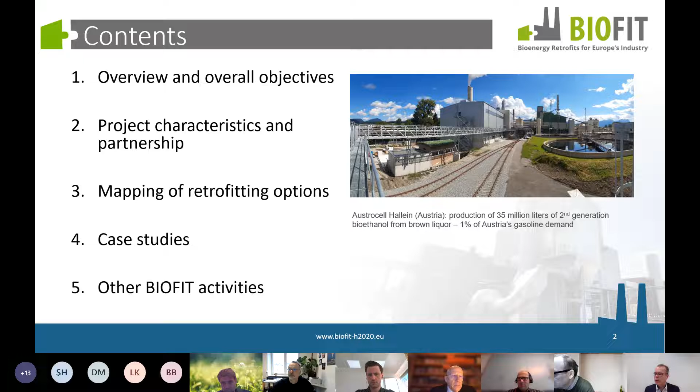BioFit is about the importance of bioenergy for energy production and consumption in the European Union. About 58% of the renewable energy consumed in the EU is bioenergy. Yesterday we heard from the Bioenergy Europe presentation that in 2019 it's more or less the same, so it continues to be important.

That is also the idea of the IEA, which said so in their technology roadmap. Bioenergy is also not considered a transitional fuel by the EU, but is here to stay.

Interesting, what we saw yesterday was that the framework conditions are a very important part of the whole implementation. One of the case studies, Fiume Santo in Sardinia, at the start of the project was considered a good case study. During our project implementation the framework conditions changed, and it turned out that it's not possible anymore for now. So we see they very much impact what we do.

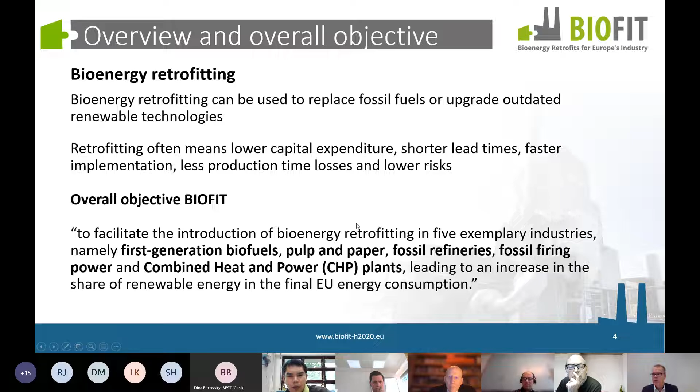We did this with 14 partners. Our project lasted a little bit more than 3 years, and we are now near the end of the project. Yesterday we had case studies in France, Italy, Greece, and Bosnia-Herzegovina.

And now we go to all different countries: Sweden, Finland, Austria, and Spain. We span many countries in Europe—not all, that's too much, but quite a lot of countries are featured there.

What we did was a number of mapping exercises to show how many successful examples of bioenergy retrofitting there are. We made very nice fact sheets, sectoral recommendation papers, and a very nice handbook which shows in detail what the various options for bioenergy retrofitting are, and we will soon have a set of digital support tools available on the website.

This is the flagship of our project. We have developed 10 case studies together with market parties that are working in the field and are looking to decarbonize their operations. Yesterday we worked on the right part of this graph, so it was on fossil refineries, fossil-fired power and CHP.

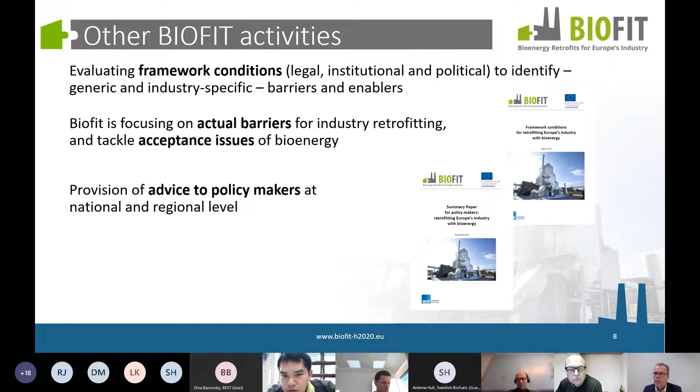We have done a lot of meetings to inform, support, and have dialogue with industry. Besides industry fora, we have also had 2 virtual business missions, and they are virtual because of COVID. One of them was to Brazil, and the other one was to Ukraine.

Today we have 2 sessions. The first session is roughly 1.5 hours. It is about pulp and paper. We will talk about the hydrothermal carbonization of pulp mill wastewater sludge, so it's typically an optimization project. And the other one is the production of second-generation biofuels at AustroCel Hallein, and you will see more of the thing which I showed you the picture of earlier in the presentation.

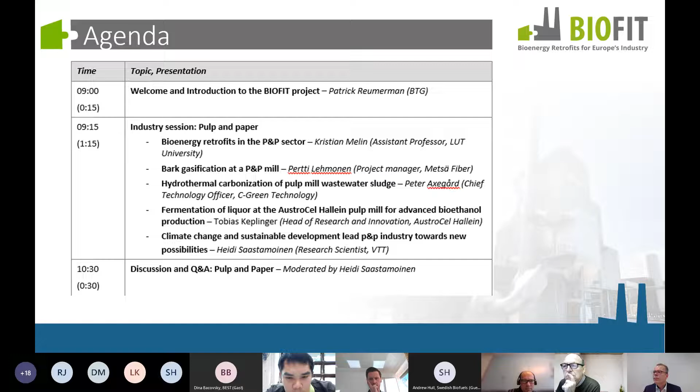Then we will have a short break and we will go to the second part of the conference. It's about 1G biofuels. We will talk about the Biocarburantes de Castilla y León 1G plant in Spain, and we will talk about one of the ways to produce jet fuel from biomass. This is, of course, a very hot topic, and one of the ways to do that is via the alcohol to jet process, so Swedish Biofuels will give a presentation on that.

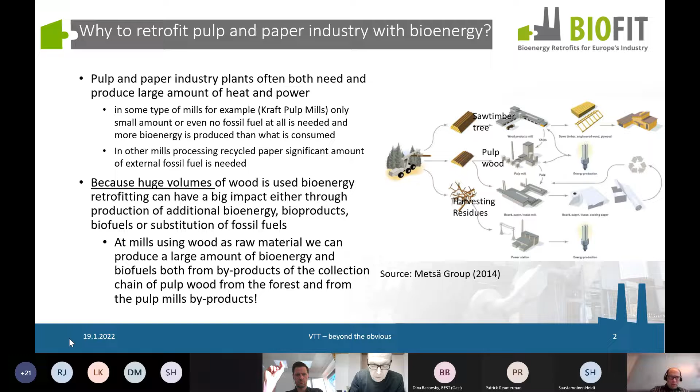Okay, let's go on, checking the time. So now something about the drivers and barriers for pulp and paper industry retrofits. Why are some drivers present, especially at the chemical pulp mills?

Chemical pulp mills already today produce a lot of bioenergy. All the time we have this development where mills are getting more energy efficient, so there is a bigger and bigger possibility to produce something else than just energy for the plant - more bioenergy or additional products like biofuels or bioproducts.

Another development is that, at least in Finland, earlier the pulp and paper mills were located next to each other, but new mills, for example Äänekoski, have the paper produced somewhere else. This means there are a lot more possibilities to produce additional products or bioenergy. And of course we have the global trend that newsprint paper production is decreasing.

So there is a need to produce other products besides paper and cardboard, and that could be done through bioenergy retrofits. I heard a famous expert, some of you may know Ali Harlin, say that even though cardboard production is increasing, it still doesn't make up for all the decrease in newsprint production. So there is really a need for new products.

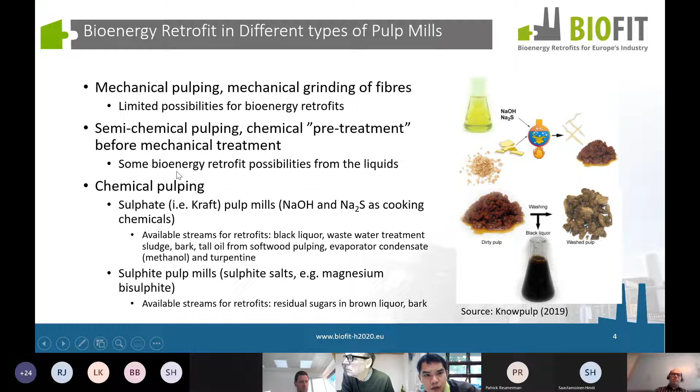I illustrate on the next slide more in detail those, but there is the black liquor and bark and so on. And then there is the different type, the sulfite pulp mills. The sulfite pulp mills are less common today.

And these have totally different possibilities, the sulfite and sulfate kraft pulp mills. So let's then consider first these kraft pulp mills, which are the most common mills, at least up here in the north, but I think also in the world. So how does this process basically work?

So it's so that we basically cook wood chips in the pulping step, and what happens is that some part of the wood dissolves in this liquid called black liquor. In this case, it's mostly some part of the hemicellulose and lignin that goes here, and the sugars are actually degraded, so it's not possible to make any kind of fermentation after the pulping step from them.

And then, okay, the pulp is basically bleached, and then if the paper plant is at the same site, there is cardboard production. But then what is interesting for the retrofit is the byproducts.

Here, this liquid after pulping contains quite a lot of water, up to 85%. But already when we concentrate it by evaporation, we get some streams that can be utilized. For example, from the evaporator condensate we get methanol, and I will explain a bit more in detail about that later. A small amount of methanol, and then okay, the black liquor.

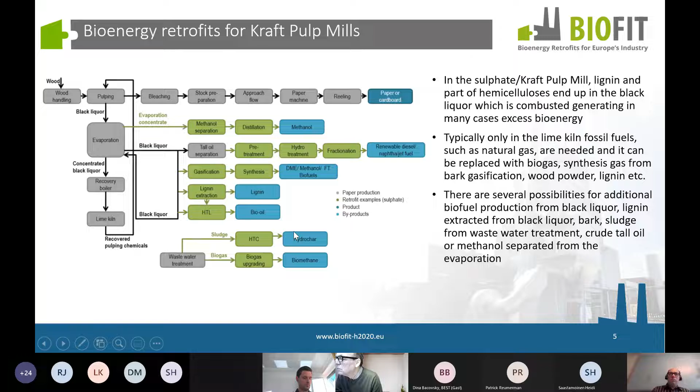And of course, there is also production of wastewater at the mill, and there is typically this activated sludge wastewater treatment process, but there could also be biogas production from this sludge, and another option that we will hear about, studied also as a case in this project, is hydrothermal carbonization, turning that into biocoal or hydrochar.

Then, okay, if we look at the status of these retrofit options today, we have to keep in mind that they have different technical readiness levels. Some of them are already commercial, whereas some are still in the demonstration phase or pilot phase, or even at a lower technical readiness level.

So what is commercial today is biogas production from mill wastewater treatment. For example, in Äänekoski there is production of biogas, and I think nowadays this belongs also to Metsä Fibre. And then there is gasification of bark, which we will hear about today, already practiced in two mills in Finland by Metsä Fibre.

Then there is lignin extraction from black liquor, for example the LignoBoost process in Sunila in Kotka by Stora Enso, or then Domtar in the USA. There are also other processes than LignoBoost for extraction of this lignin. I think there is LignoForce, and Andritz also has this A+ Lignin.

And then there is also biofuel production from crude tall oil. Maybe a famous example is the UPM biorefinery in Lappeenranta, but also in the northern part of Sweden there is SunPine. I think that was in Piteå.

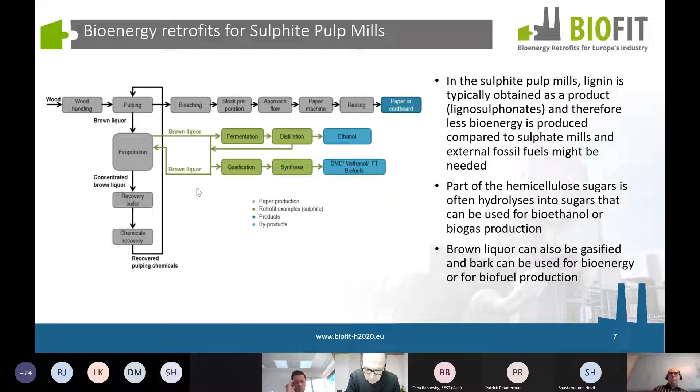Here, after pulping, in the brown liquor we actually have fermentable sugars produced from the hemicelluloses, and they can be turned into ethanol or biogas. One other process that has been studied, at least conceptually - I don't know if it's been demonstrated at any larger scale - is the gasification of the brown liquor.

Let's go to the next slide for some examples. Biogas production has already been run at other plants. For example, Austrocell, which we'll hear more about today, has produced biogas earlier, and retrofitting this to bioethanol production is being studied as a case study we'll hear more about.

Ethanol has also been produced at the Borregaard plant, which as far as I know is also an old sulfite-type mill. I could also mention that during the summer I visited Metsä, or in Mänttä, there was a museum with a sulfite pulp mill, and they mentioned they had produced bioethanol there, and also had some development to produce single-cell protein, but this facility has since been closed down.

Then to the summary slide. Finally, retrofitting in pulp and paper mills is interesting because there are such big volumes - so even if we use a smaller side stream, it will have a large effect.

What kind of retrofit options do we have? It really depends on the type of pulping process - is it chemical, semi-chemical, or mechanical? And is it a sulfate or sulfite process? Also, whether fossil fuels are still used at the mill or not.

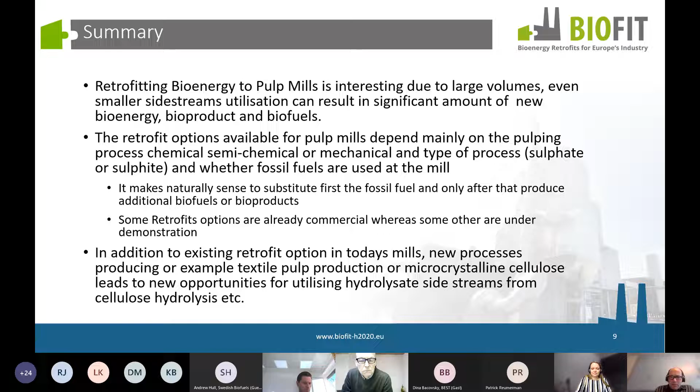So I think that was more or less it. Hopefully I kept the time. I just want to thank - it was a pleasure to work on this project, and special thanks to Heidi Saastamoinen and Elina Mäki from VTT. If you have questions, I will stay for the questions, but you can also find my email address - so please contact me.

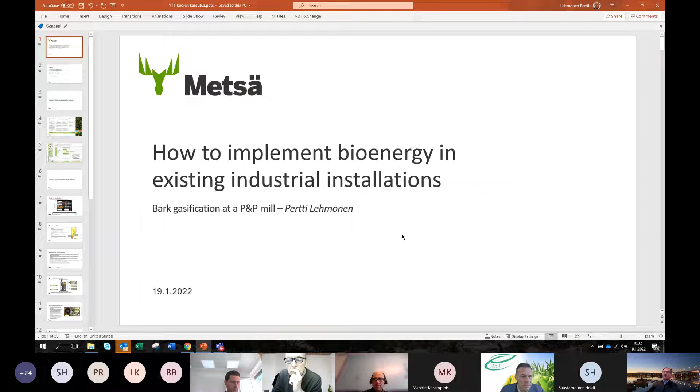My presentation is about how to implement bioenergy in existing industrial installations at the Joutseno gasification plant, and I'll also take the opportunity to discuss a little bit about the Äänekoski gasification.

I'll start with our targets, share our sustainability targets at Metsä Fibre, give you a few words about the gasification process itself, then we can go deeper into the Joutseno and Äänekoski bark gasification plants, and then discuss the experience about the gasification processes.

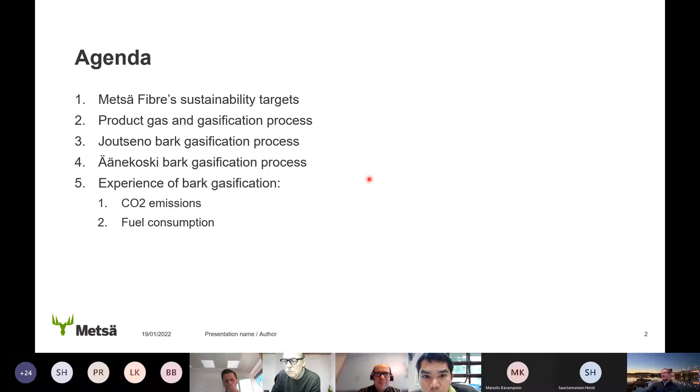We at Metsä Fibre are aiming for fossil-free operations, and one part of this fossil-free operations goal is to reduce or replace fuel consumption in the lime kilns. That is the last and might be the hardest part to achieve fossil-free production in the pulp mill.

Our roadmap to fossil-free production aims at 2030 to be totally fossil-free, and these lime kilns are the last remaining processes consuming fossil fuels. We have two lime kilns already operating with non-fossil fuels, and we're building a new pulp mill in Kemi, which will have bark product gas as fuel in the lime kiln. We're studying what to do about the existing Rauma pulp mill, where we're also building a new sawmill. We're quite confident we can reach this target by the end of the decade.

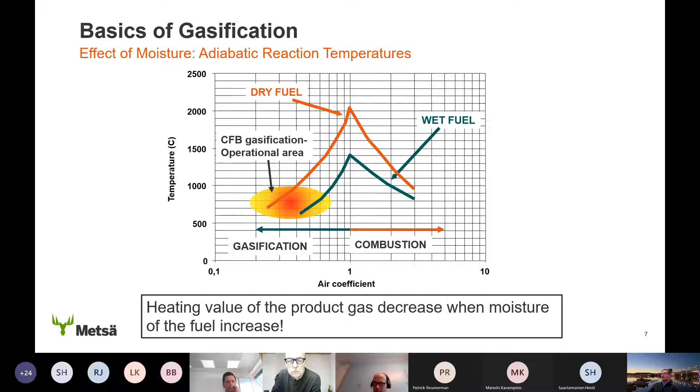The gasifier itself is a kind of circulating bed gasifier connected directly to the lime kiln, so the gas flowing from the gasifier to the kiln is called dirty gas. There is tar and dust particles that burn in the lime kiln. It's unpurified gas, so the major portion of the wood ash is fed to the kiln.

The circulating bed material is calcium carbonate, and the kiln power need controls the fuel feed to the gasifier itself. We get the primary air back to the gasifier from the kiln cooler, so the energy efficiency of the gasifier is quite good.

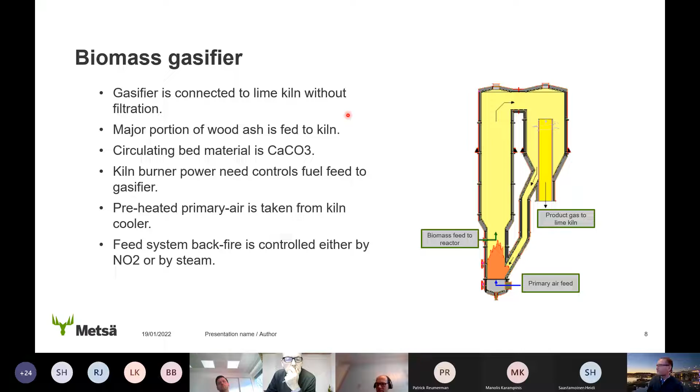We need to have a backfire control system here. It's done with either nitrogen or steam - not nitrogen oxide, just nitrogen or steam - that prevents backfire into the fuel feed system.

Properties of the product gas are that it's quite hot, so it's capable of self-igniting. Normally we operate at the 700 to 800 Celsius level in the gasifier, so it will ignite when it meets oxygen. Operating temperatures are also above the tar condensing temperature, so we don't have to worry about tar condensing in the gas lines.

Gasifier temperature is achieved by partial burning, so the air factor of the gasifier is about 0.3. The product gas contains lots of unburnt carbon and ash from the fuel, and the heat flow of unburnt carbon is about 20% of the total heat flow. This will of course burn in the lime kiln, but it's something to consider if this kind of application is thought of for other processes than the lime kiln.

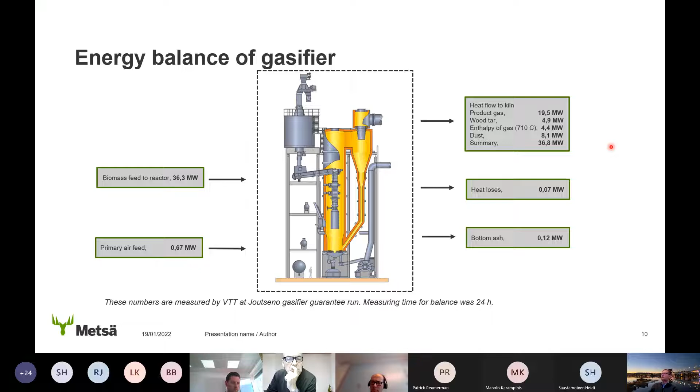The burner can be operated 100% with the product gas without support fuel, and fuels can be switched, turned off and on quite flexibly. The kiln parameters, how it's operated, are exactly the same with or without product gas, so it's operated by the oxygen level in the flue gases and by the residual carbon in the burnt lime.

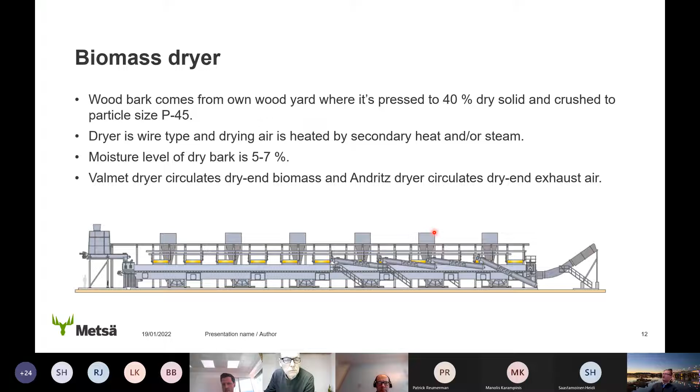There are two major suppliers in the pulp and paper applications, Valmet and Andritz, and they are a little bit different in terms of the wire design, but the basic principle is the same, it's a belt dryer. Valmet is circulating this biomass, and Andritz is circulating the exhaust air from the dry end of the dryer.

In the Joutseno process, we are operating with a burner power of 48 megawatts, and we have to evaporate water in the bark dryer at 12 tons per hour.

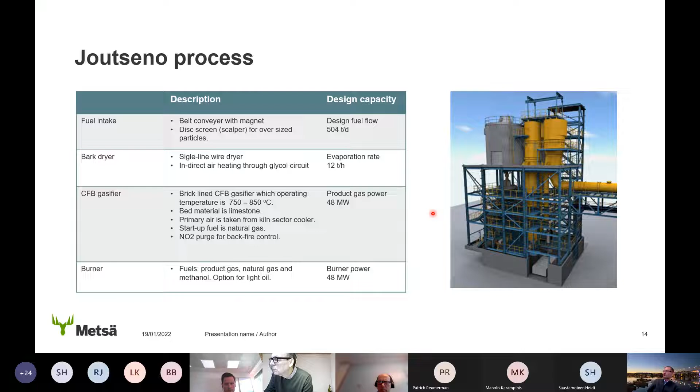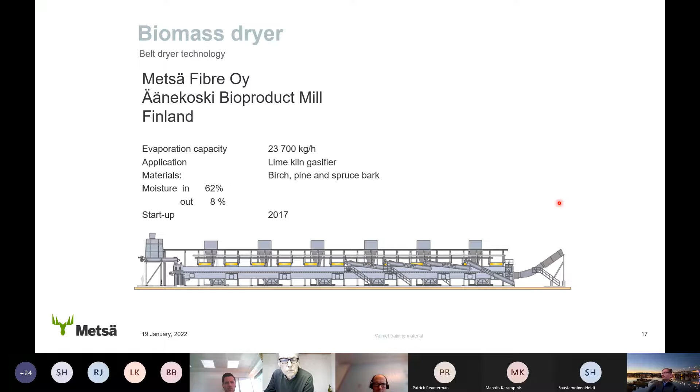Our Äänekoski mill is a little bit bigger, so we have more power in the burner, 87 megawatts, and we have to evaporate water here over 20 tons per hour, so it's 23.7 tons per hour evaporation rate. In Äänekoski we have birch, pine and spruce bark, as well as in Joutseno.

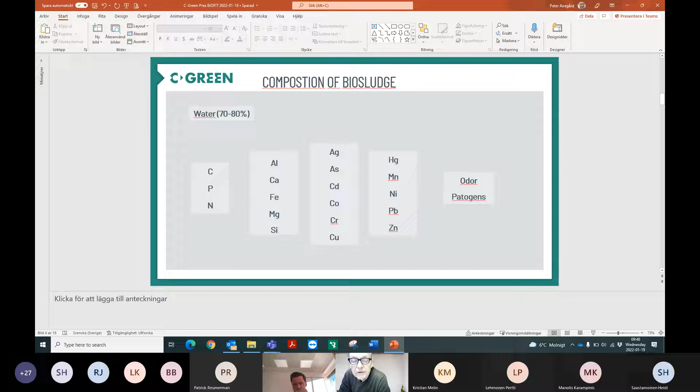And it has a certain carbon content. The yield of carbon could be 50-60%. Phosphorus has a higher recovery into the solid product, and nitrogen is distributed between the solid, water, and the hydrochar.

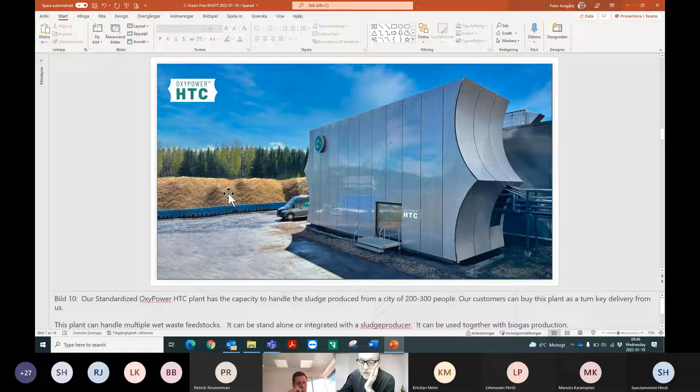What more to say here? This is how it looks today. We are trying to have a nice appeal, so this is just a nice image. In the background you see a big pile of wood chips, but we are not processing wood chips at all.

Our process, very simplified, is that we take in the water sludge. We heat it, we dilute it, we heat it with internal water. From our process we heat it with steam, so it reaches 200 degrees. We heat this in steps with direct steam and dilution with hot water. The reaction time here is about 1 hour, and here you get the carbonization of the organic substances.

So a slurry of hydrochar particles, HTC biocoal particles, is formed and sediments to the bottom. This slurry is taken out and the water is removed by press filtering. Here you see the solid product.

The liquid phase contains dissolved organics and some nitrogen, and we treat this water with oxidant from air, which oxidizes the water, or the organic is oxidized, and heat is created, and we recycle steam. So we are completely heat self-sufficient. It is also possible to produce excess heat at high temperature levels if there is a need for that. Otherwise we don't do it, and we have more organics in the water. And the water after this treatment is taken back to the wastewater treatment plant. That is the short version.

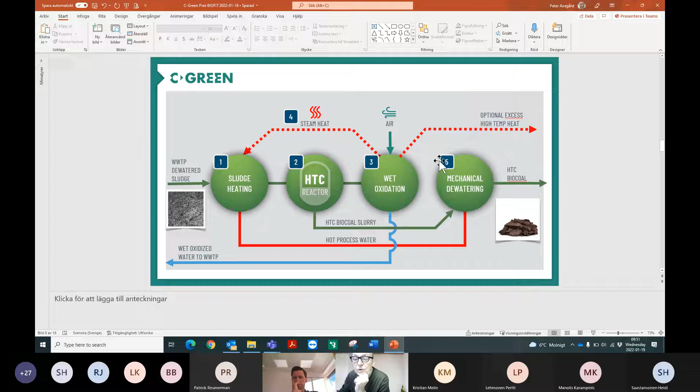What happens in HTC is simply this: in the first minute, or seconds I should say, at 200 degrees, there is a rapid loss of gravimetric yield, and this is the HTC chemistry. Most of the molecules in the water are decarboxylated and dehydrated, and this means these molecules are becoming more and more hydrophobic. That's why a solid phase is built up gradually, and sediments.

That's why we need up to 60 minutes to get this phase separation, where you have a hydrochar slurry, that is the water, and the liquid phase containing the dissolved organics goes through wet oxidation.

In wet oxidation there is a lot of chemistry happening. We start at 200 degrees, then increase it to 230 by releasing steam. Before wet oxidation, the water is very odorous and contains significant amounts of COD and organic nitrogen. In the wet oxidation process, COD is reduced by up to 70%, producing heat, and the nitrogen is converted to ammonium ions that can be used as a sort of fertilizer in the pulp mill, paper mill, wastewater treatment plant.

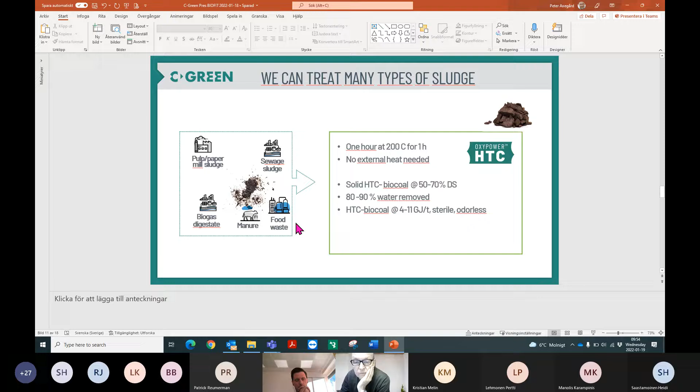Applications: biofuel, of course, is an interesting opportunity, in contrast to sludge that has a negative heat value. This is, I would say, not recommended because the customer decides, but it makes sense in some cases where pollutants are involved—then incineration in a classified boiler is the way to deal with it most likely.

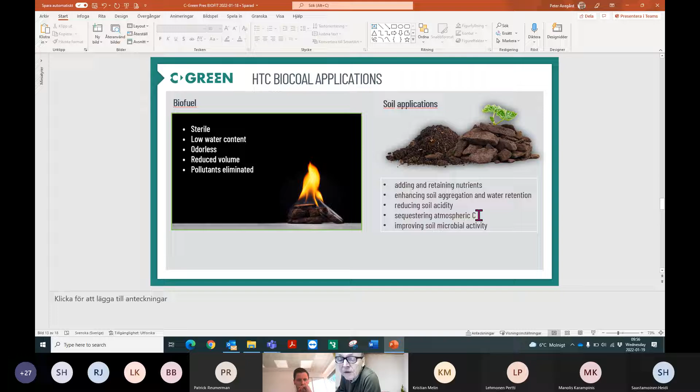But we also look into soil applications, and if you have a relatively clean sludge, this is an interesting opportunity. Often in Sweden, and I guess Finland too, peat is used as a soil additive together with other feedstocks. So hydrochar could fit nicely into peat mixtures. This hydrochar contains nutrients and has some water retention capacity and things like that. It's relatively stable in soil, so there are some environmental benefits.

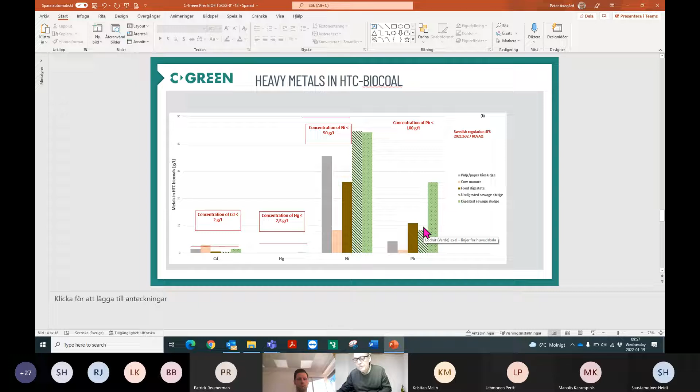So I will show you some slides here. Heavy metals in the hydrochar—you see for different feedstocks the range. This is the pulp mill case, the gray one. This is the limit values for soil applications in Sweden. And all feedstocks are below the threshold level except manure—assuming they were using some cadmium-containing nutrient on the soil on that land. Mercury is well below, nickel is well below, and lead is also well below. So soil applications from this point of view could be possible.

In addition, as you can see, it's a very nice place to work. It's a beautiful scenery. So after COVID, I would be more than happy to welcome you in our mill to show you the bioethanol production. And after that visit, you can then enjoy the nice area in Salzburg.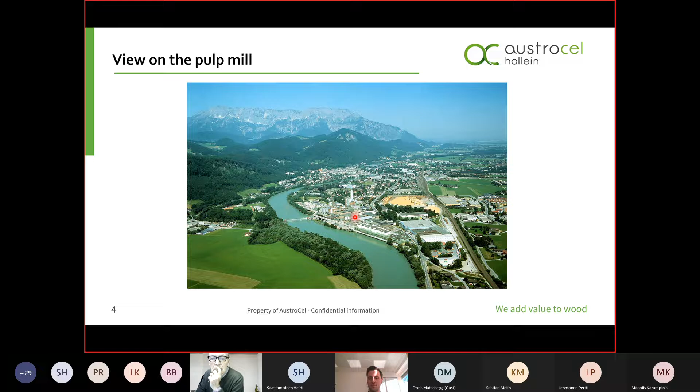I want to give you a brief history, because I think it's important to understand why this bioethanol production was so important to us. Basically, the pulp mill in Hallein is one of the oldest, or the oldest, industrial company at the same place in Austria. We have been operating at the same place since 1890. Over the years, we had different owners, and of course there have been different retrofits. But I want to highlight one major year, which was 2009.

In 2009, we stopped our paper production. Of course, this was a big cut. At that point, we started to think what could be a possible economical scenario in the future, which kind of products, which kind of strategy. This is also the starting point for our focus on bioenergy in general, because we decided at that point to switch our production from paper pulp to viscose pulp, and in addition to bioenergy applications. This was during the last years since 2009.

So basically, we invested a lot into our biogas production, and after the biogas production, we started to invest in, or to build up, our bioethanol production.

Just some numbers about AustroCel in general. As I said, our main product is still dissolving wood pulp, so high specialty wood pulp with very high purity. At the moment, we are producing around 120 to 140,000 tons of pulp. We are nearly 300 people in the mill.

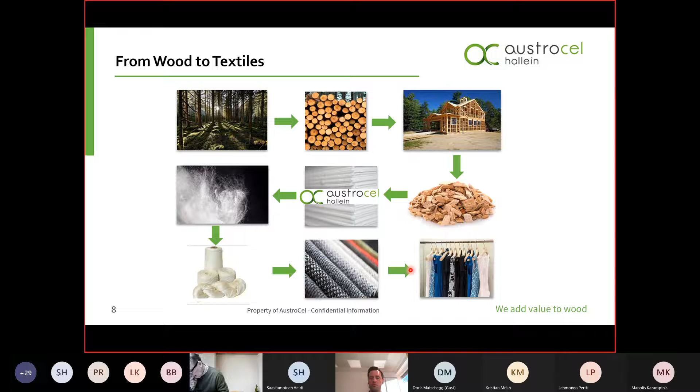I'm pretty sure you all know that during the pulping process, the main component you utilize is the cellulose. But cellulose is only around 40% of the total composition. So it's very important for an efficient process to also make use of the rest of the wood components, which are the hemicellulose and the lignin.

During this pulping and cleaning process, you remove the other components. The cooking liquid, for example, is composed of lignin and sugars. The great thing about this brown liquor is that the sugars are already present as monomers. So you can directly make use of these released sugars for fermentation, to produce bioethanol, which I'll show in the next slides.

Of course, you also remove filtrates and rejects during the cleaning of the pulp, and it's important to make use of them too. One example: out of these filtrates, we do biogas production. This organic material is fed into four biogas reactors, producing biogas at a capacity of around 2,000 cubic meters per hour.

This biogas is then fed into a large biogas motor with about 5,000 horsepower, producing a substantial amount of electricity. We also have a biomass CHP, where we put in internal residues from our pulping process, producing electricity and heat. The heat is partly fed into the national grid, but also used internally, for example to run the drying machines for pulp production.

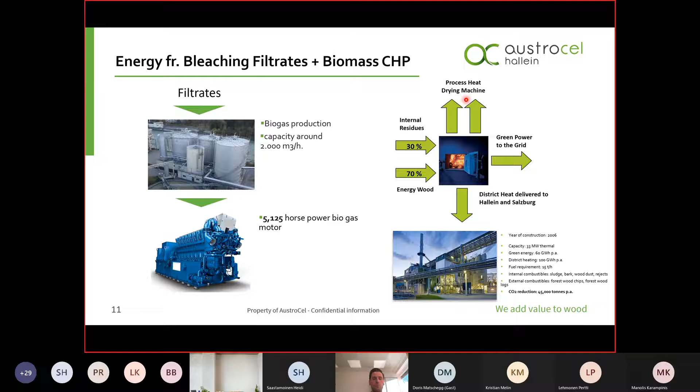But the focus today should be a bit more on the bioethanol production, so I'll give you a brief overview of the project. Bioethanol production in Hallein is not new—there was already bioethanol production from brown liquor during the years from 1941 to 1988.

This is important because brown liquor is actually a quite challenging medium for bioethanol production. Based on this long-standing experience, there was a calculated technological risk taken for a new project to build a new bioethanol production for second-generation bioethanol. During 2007 to 2009, there was already a comprehensive pre-project and feasibility study, determining, for example, the economic feasibility.

There was also quite some research and development going on. But as I mentioned before, in 2009 our paper mill was shut down, which was, economically, quite a challenging situation, and it hindered realizing this project. Then, in 2011, as I also mentioned, the switch was made to producing dissolving wood pulp.

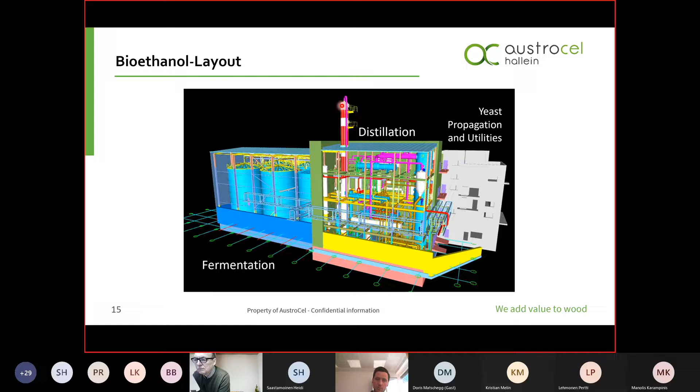So one picture of our bioethanol facility you can see here. This is just the planning. As I've said, there are basically two main parts. Here you see the fermentation tanks, we have four of these. Here the continuous fermentation is going on, and then the fermented slurry goes into the distillation plant with the big distillation column.

And of course this is also very important, that you have a railway connection in order to transport the bioethanol to the customers.

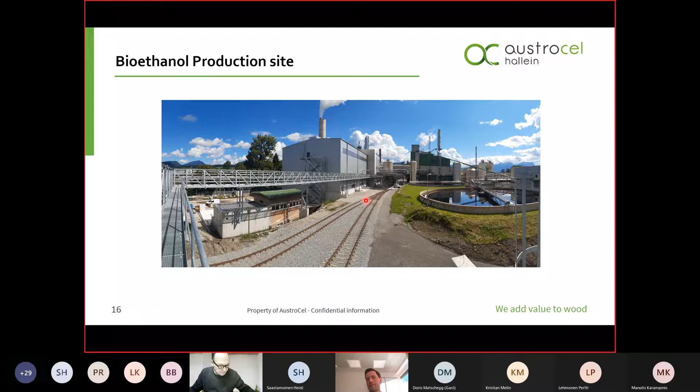What else? I also want to briefly highlight that for this project, one of the main things that was very important for a successful project is research and innovation. So basically what we do in-house, all the development in terms of fermentation, testing yeast, developing yeast, we did in-house. This is expertise that we have in our research department.

This is of course connected with all the according analytics in terms of HPLC, sugar analysis, and things like that. I think this is very important because, as I said before, this liquor is quite challenging in terms of inhibitors and things like that. You need this in-house expertise to have solutions when there are any kind of problems during production. So basically what we have is not only lab scale experience.

I think these are important factors to be successful for a project like that. In summary, for this bioethanol project, we successfully implemented bioethanol production in the brown liquor cycle, as I described before. The whole project had an investment of about 42 million euros.

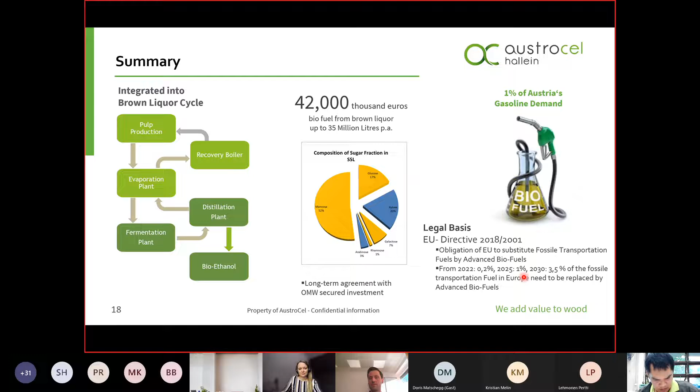And this is our motto: AustroCel is fighting climate change, don't talk, just do it. I think with this project, this is exactly a support for this statement. Many thanks for having the opportunity to present this project here.

Thank you very much, Tobias. This is a good motto and a nice plant you have there.

I will present the last presentation myself. It's concluding the results that we have in the BioFit project for the sector. Let me know if you can see my slides now. Yes, we can see them.

So to conclude, as you have heard today, bioenergy retrofits lead the pulp and paper industry towards new possibilities. First, I want to show you some statistics from CEPI to showcase the size of the sector we have in hand. We have almost 900 mills in Europe, producing annually 36 million tons of pulp and 85 million tons of paper and board in Europe.

The number of mills has steadily decreased since the 90s, while for at least the last decades, pulp production has stayed relatively stable. As you've heard already, the sector is revising their business models, seeking new high-value products and widening their product portfolios.

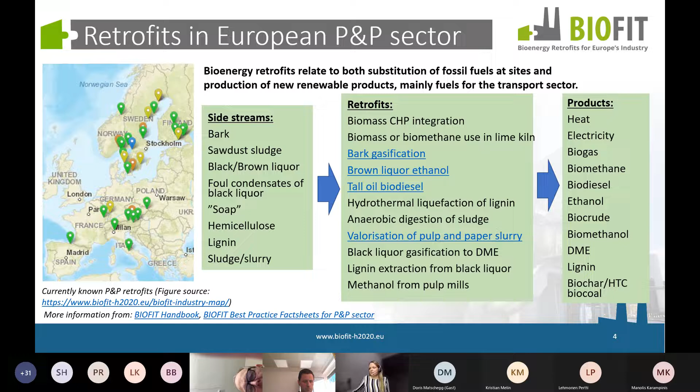Then drivers, Christian already talked a bit of this. So we have digitalization, which decreases print paper consumption globally, and that means we need to find new products for the sector. Then we have climate change mitigation, we need new renewable energy sources, fuel sources, and product sources. And also, as Tobias highlighted in the last slides, we have targets, especially for advanced biofuels, and actually most of the side streams listed in the previous slides are listed there in RED II directive, I think it's Annex 9. The side streams that can be used for advanced biofuel production count towards this target, so there is a good opportunity.

Then we have circular economy initiatives and sustainability issues in the sector. So we need to use raw material more efficiently, and this is something in which bioenergy retrofits are also useful, and they can increase the energy and material efficiency of the plants, especially if there is excess energy at the plant.

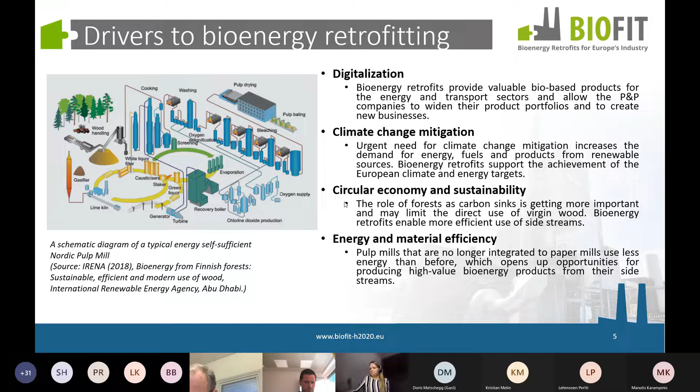What is needed then to do the retrofits? As Christian told, they are not directly replicatable from mill to another, but it depends on the pulping technology whether we can actually use a certain retrofit. Also, it depends on the local conditions at the mill, what is there in the place, and if there are markets for the end products at place. Also, the volume of side streams restricts - if there is not enough side streams, then we don't have a lot of final product. So the feasibility must be assessed case by case.

However, we have found cases in which the retrofitting leads to further retrofitting. For instance, Norske Skog's mills, from their first biogas production plant, extended retrofitting to other mills of theirs. Also, we heard that the gasification that started in Joutseno has been extended to the new mill in Äänekoski and is planned for the Kemi mill that is going to be built.

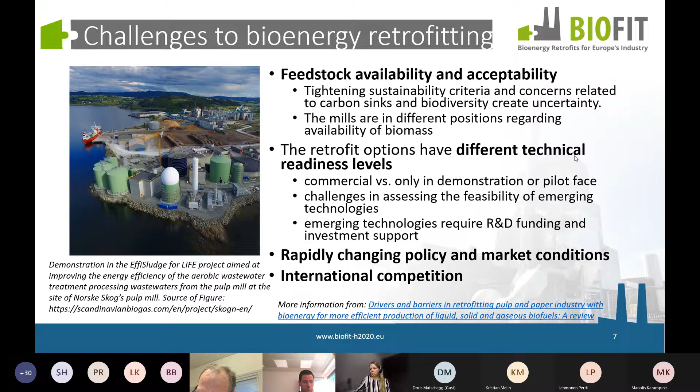To conclude, some recommendations for the sector. We recommend that research and development funding, as well as investment support, is targeted to technologies that allow efficient side stream utilization and increase overall efficiency of the plants. Also, we need some long-term political support and consistency in development of the regulatory framework. This enables these investments that require some high upfront investment.

Then also we have these mills in Central and Southern Europe that are using natural gas as their feedstock. Research and funding allocated for broadening the feedstock base could be helpful there, and we would like to give some awareness towards this problem. Then to tackle the international competition, the European Green Deal has proposed a carbon border adjustment mechanism which is of importance for the sector.

These were my conclusions. Lastly, I was asked to present also the digital support tools that we have made in the project. These are made based on 5 case studies in the project, for 5 different retrofitting technologies, one for each sector. We also have a pulp and paper digital tool there, which is based on the case study of HTC that was presented here earlier.

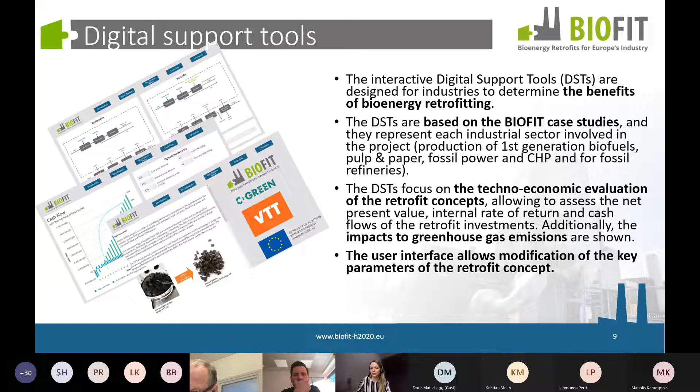These are easy to use. You can evaluate the benefits of bioenergy retrofitting, roughly assess the techno-economics with parameters that you want to set there. Now I'll change the view to show you where you can find this tool and show you a little bit how it works. So wait a sec.

Okay, now can you see the BioFit web pages on your screen?

Yes, here on the left-hand side, second item, we have a BioFit digital support tool. If you click here, you go to the page where all of the tools are listed. We have one for district heat production, pulp production, fossil refinery sector, 1G biofuels, and for fossil power sector, each with a short explanation.

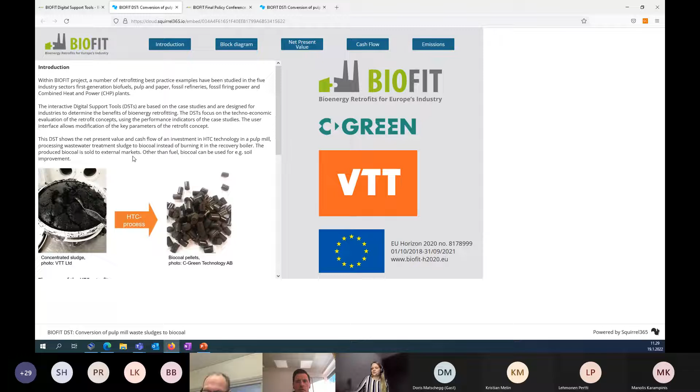Then if you click here below the certain retrofit, this is the pulp and paper sector retrofit, you can actually get to the tool. Here we have a short introduction, first a leaflet with a short introduction to the tool. Then we have a block diagram showing the reference case, what was there at the plant before retrofitting, and then the retrofit case. Here you can modify some assumptions already, for instance in this case you can determine the amount of sludge you have.

Then with this assumption and some other assumptions that you give, you can calculate the net present value of your investment. Here you can give costs, how you think the electricity price is, or for instance the product price. If you increase the product price here, you can see that the retrofit becomes more feasible.

Then we have the cash flow with the same assumptions here. You also, if you change the parameters, can see how it affects the internal rate of return. For instance, if the electricity price is getting down—I think that might not be the case, but anyhow.

And lastly, you can evaluate the emissions from the reference case to the retrofit case, what happens with certain assumptions. Here you have the description of the boundaries for the calculation. So please go there and test the tools freely.

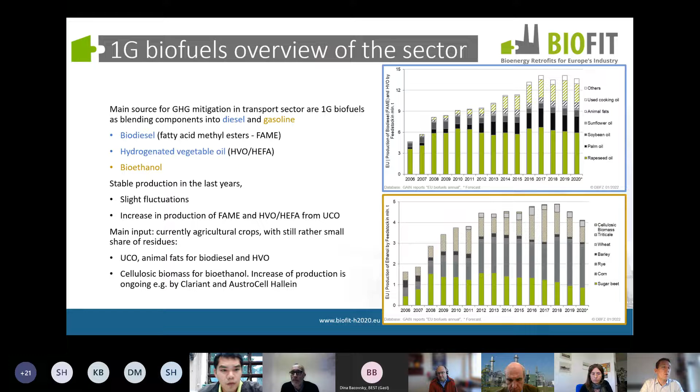So what is being done — the efforts are there to produce more waste-based biofuels, but they are not much to see in the market so far.

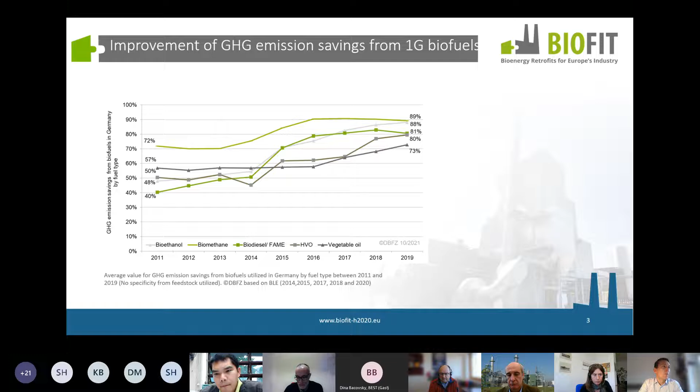A different view on the biofuel sector is the view on the impact they have. This is a graph showing the improvement in greenhouse gas emission savings from first generation biofuels, for the German market, as a timeline of greenhouse gas emission savings for different types of biofuels. You can see that the savings compared to fossil fuels have increased significantly since 2011 until 2019, and some of these better greenhouse gas emission savings from the biofuels, of course, result in retrofits in the plants. Some effects are also in the organizational structure of the biomass feed chain, so there are different factors, but you can see that they are quite efficient already.

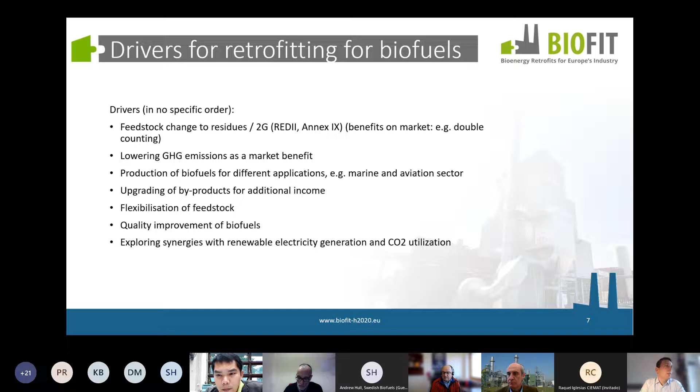So what have we done in the BioFit project? It was already presented in the morning. We have compiled a map of the facilities, of retrofitted facilities, and fact sheets, and we have written a handbook on technical options for retrofitting, where we also looked into technical options. We will hear more about those later on from my colleague Stephanie Hauschild.

We have held industry fora with experts from the biofuel industry. We started with a meeting in Leipzig on retrofitting measures with a special focus on biodiesel plants. We had a very nice and large meeting in Madrid about retrofitting first generation biofuels, which was more focused on bioethanol. Then in the later part of the project we had several online activities. Unfortunately there were no more face-to-face meetings on this topic, which is a pity, but yes.

We also held some surveys on drivers and barriers and public acceptance. And from all of these activities we came up with policy recommendations, which will be presented tomorrow at the policy breakfast, which you're all invited to, and also some sectoral recommendation papers for the biofuel sector, so much of this information can be found on the website.

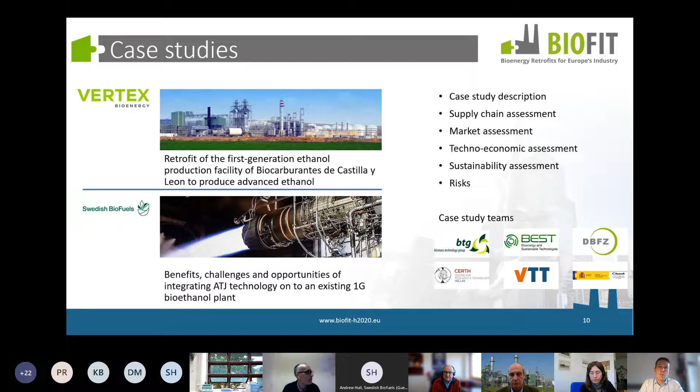So this was my brief introduction into the session, and we will now continue to hear some more details about the challenges and opportunities in 1G bioethanol production from Antonio Jose Vallespir, who works for Vertex, a bioethanol producer from Spain. And I will stop sharing my screen if I find the button.

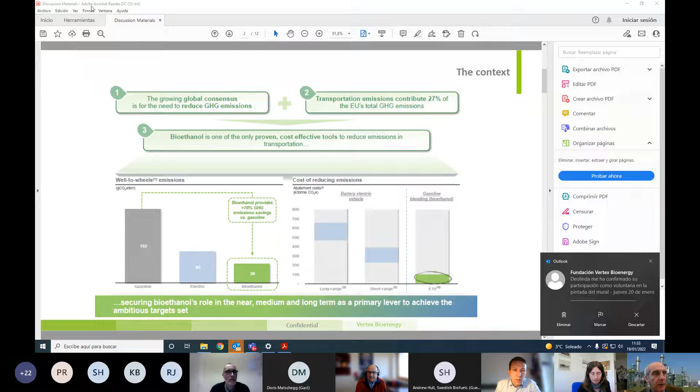Okay, I will try to share mine. Yes, I don't know if you can see. I got it. Okay, Antonio, you can see, and let me... No, Antonio, we can see it. Okay, let me check. Yes. Yes, now? Yes, yes. Okay, all right, all right. Okay, yes, thank you. Are you seeing the presentation or not? We're seeing the PDF about the meeting. No, now? Yes, no, it's okay.

Okay, sorry. So I will introduce a little bit the basis of bioethanol, and also why we think biofuels, in that case bioethanol, is so important, or is going to play an important role in the decarbonization in Europe.

I will say that bioethanol's importance in the near, medium, and long term is obviously secured by, one, the growing global consensus for the need to reduce greenhouse gas emissions. Second, transportation emissions contribute more than 25% of the total greenhouse gas emissions in Europe. And third, bioethanol is one of the only proven cost-effective tools to reduce emissions in transportation.

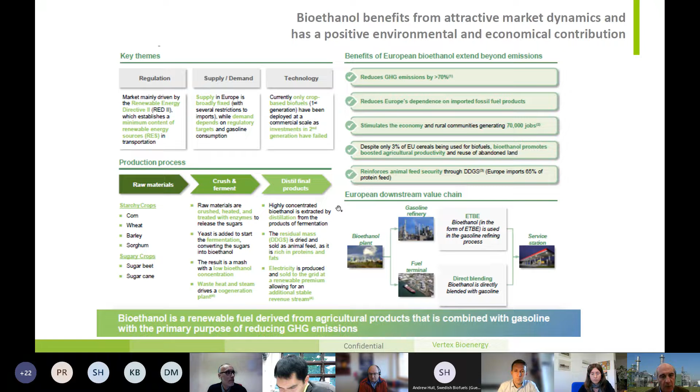Just to give an update about Vertex and the four facilities we have in Europe, knowing it's a carve-out coming from Abengoa Bioenergy in 2017. Vertex has 780 million liters of capacity in Southwest Europe, which is all of the capacity in the region, and we have a unique logistical competitive advantage.

The first plant is Cartagena, the sole plant with direct access to the Mediterranean market. For markets like Greece, Italy, and also Spain, which as we said use mainly ethanol as an oxygenator to produce ETBE instead of direct blending. This facility started operations more or less in 1999. Today we can produce 113 million liters; the nameplate capacity is 108 million liters. We also have cogeneration of 22 megawatts per hour.

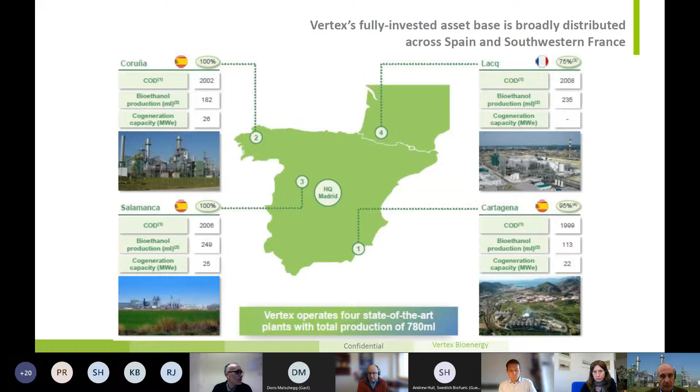Now let's highlight why bioethanol, based on two factors: one is regulation supporting biofuels, and on top of that, the shift toward gasolinization that we've experienced since 2015 with dieselgate in Europe. Under Renewable Energy Directive 1, until 2020, and Renewable Energy Directive 2, until 2030, both have set ambitious targets for overall emissions reductions—20% by 2020 and 32% by 2030.

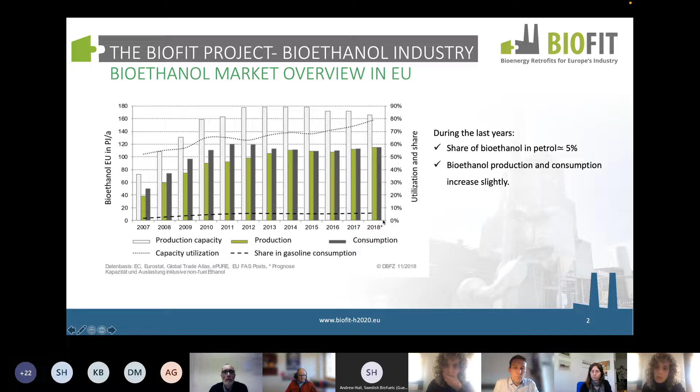This figure shows the development of the production and consumption in the European Union. As you can see, in the last years, bioethanol production and consumption is really similar and also increased, but slightly. Regarding the share of bioethanol in petrol, in the last year it remains practically constant at 5%.

The conversion of these raw materials is relatively simple compared to advanced production processes, and there are well-established technologies for obtaining the corresponding sugar and converting it into bioethanol. However, concerns on the sustainability of first-generation bioethanol, such as the use of food-related feedstock in the energy industry and the impacts on land use and water resources, have promoted the production of bioethanol from lignocellulosic biomass.

And why bioethanol from lignocellulosic biomass? First, lignocellulosic biomass is one of the most abundant renewable sources. In addition, these feedstocks are not linked to the food market, and many of them are residues, such as agricultural and forest residues.

from agro-industries, the organic fraction of municipal solid waste, etc. From a life cycle perspective, it usually presents lower CO2 emissions, and last but not least, it's possible to obtain different high added value products within an integrated biorefinery concept.

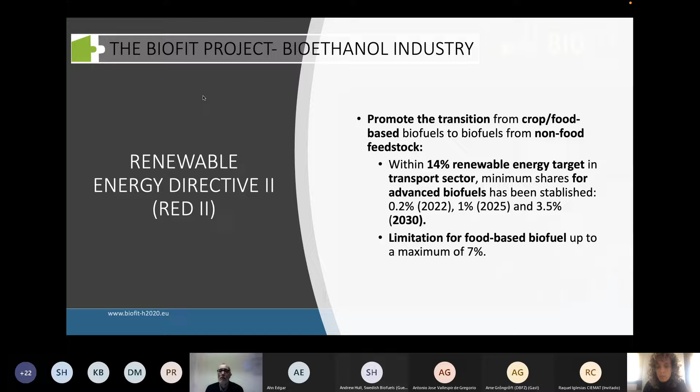Now, focusing on the BioFit project, the main opportunities for retrofitting the first-generation bioethanol industry identified are the following. First, policies are the main driver to promote the transition from first-generation to advanced biofuels. Since advanced bioethanol production still presents uncertainties regarding its economic viability, the integration of second-generation technology into an existing first-generation facility could be an excellent option to ease this transition.

In addition, integration of first-generation and second-generation technologies could result in some synergies such as the following: taking advantage of the existing product distribution and feedstock supply and storage system, using the lignocellulosic parts of sugar and starch crops, sharing the purification areas, adapting the sugar content of the fermentation by mixing the mass, sharing the general infrastructure, and finally using the lignin as renewable fuel or even for high added value compound production.

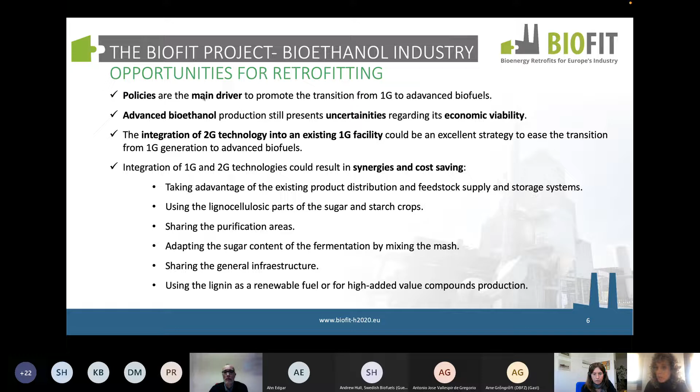One of the main activities of the BioFit project is to develop a concrete case study, in this case for the retrofitting of a first-generation bioethanol facility. To carry out this case study, we worked together with the following research partners, BEST, BTG, and CERTH, and also with an industrial partner, Vertex Bioenergy.

In order to obtain the necessary data for advanced bioethanol production, we have modeled the retrofit case using process simulation tools. In this project, we have used the software Aspen Plus. Through this software, we have been able to obtain the mass and energy balance for calculating the raw materials, consumables, utilities, and energy requirements. Once all the information was collected, a techno-economic assessment, sustainability assessment, and risk analysis were performed.

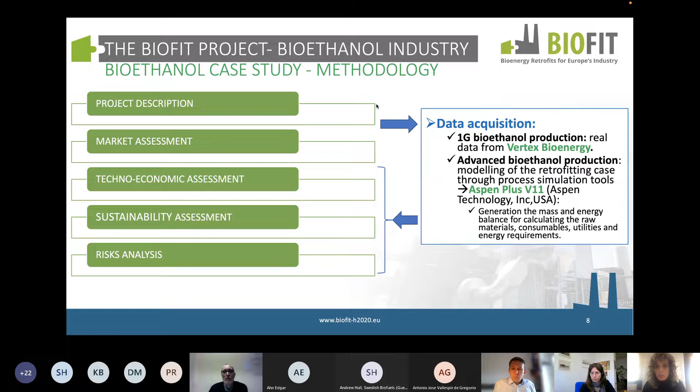In this project, two options for the bioenergy retrofitting of Biocarburantes de Castilla y León facility were established. This facility is one of the Vertex plant and is located in Babilafuente, Salamanca, in Spain.

This stream is subjected to distillation, producing high purity ethanol, and the remaining stillage is used to produce DDGs.

In order to fulfill the energy demand of the plant, this facility has 3 natural gas boilers producing all steam required for the process. This facility also has a gas turbine where electricity is produced. The resulting gases of the gas turbine are used to dry the DDGs, and the electricity produced is sold to the grid.

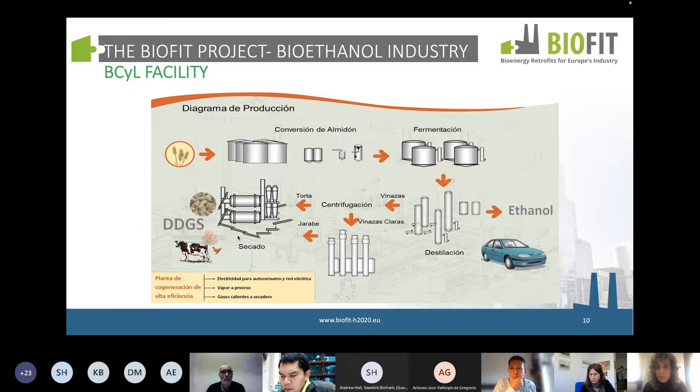As you can see, this case presents low technical complexity, and therefore it will have a low CapEx, and it will be quickly implemented.

To do this, first corn stover is pre-treated in a steam explosion unit, obtaining 2 streams. The first one is a water insoluble solid fraction called WIS, consisting mainly of cellulose and lignin. The second fraction is a liquid fraction which consists mainly of xylose.

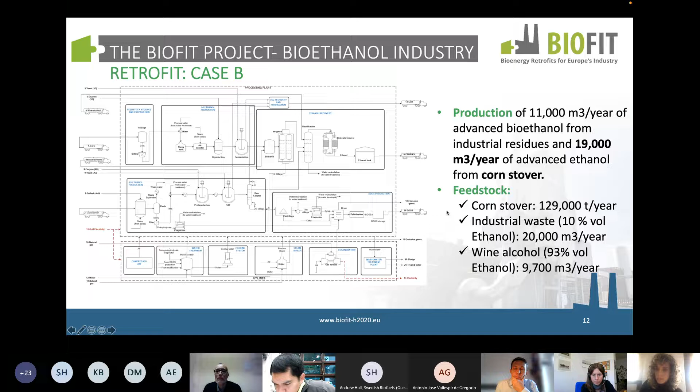In fact, in case A, a price below 750 euros per cubic meter could result in a negative net present value.

We can see also that better results are obtained for case B than for case A, in terms of net present value. This is due to the higher production of advanced ethanol in case B.

In terms of internal rate of return, you can see that the increase of this parameter is much greater in case A than in case B. This is due to the investment required in case A being much lower than in case B.

And finally, another important result obtained through this assessment is that the yield of advanced ethanol has a great impact on the economic viability.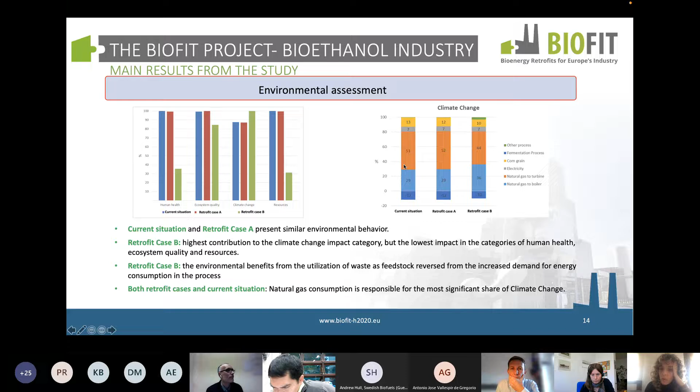In the second figure, you can see the contribution of the specific processes to the climate change category. In this category, you can see that natural gas, both in the gas turbine and in the boiler, is responsible for the most significant share of this category.

As you can see, the main risk identified is the change in regulation. This risk generates great uncertainty to decide a possible investment by the biofuel industry. Also, the risk could be mitigated through diversification in products such as bioethanol first and second generation, industrial alcohol, etc.

The next risks in order of importance are the following: decrease in support for biofuels compared to other renewable sources, such as the renewable electric car or hydrogen; the raw material supply and variability in the price of raw materials; raw material storage and the safety stock to maintain production and safety in raw material storage; and the decrease in fuel use caused by a decrease in mobility due to the pandemic.

And finally, the risk in the process due to efficiency issues. In contrast to first-generation bioethanol production processes, advanced bioethanol production usually shows less conversion efficiency, and therefore it's important to continue promoting investment in R&D in this field.

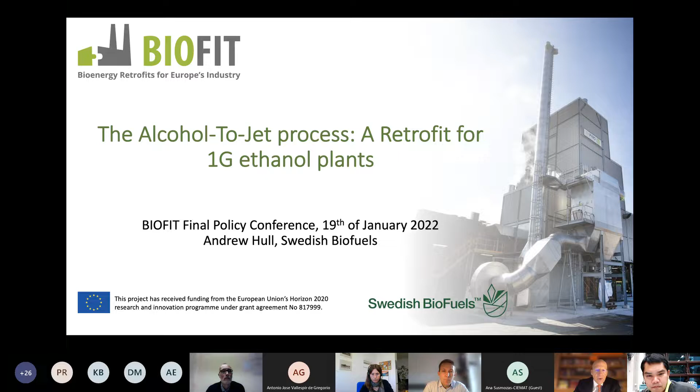So first of all, I thought it would be good to look at the ATJ process. ATJ stands for alcohol to jet, and it was originally developed by Swedish Biofuels, with the patent dating from 2004. The patent itself concerns the production of jet fuel from biomass, in particular lignocellulosic biomass and other types such as grain. But for quite a long time now, we have focused mainly on the end product, because it is actually the jet fuel which is needed in the market.

On the left-hand side of these diagrams, we start off from an alcohol, because there are many extremely competent companies capable of producing ethanol, isobutanol, or even mixed alcohols, C2, C5, to then be finished in this process, which we call the ATJ SPK process.

SPK stands for synthetic paraffinic kerosene. Taking ethanol as the example, it basically consists of dehydrating ethanol to ethene, which is the C2, oligomerizing that to isoolefins in our process—it could be other types of olefins, could be N-olefins and so on—and then hydrogenating those and fractionating them to produce ATJ SPK. The fractionation results in other co-products which are not shown in this diagram, such as standard diesel, in Swedish Biofuels' case, standard diesel.

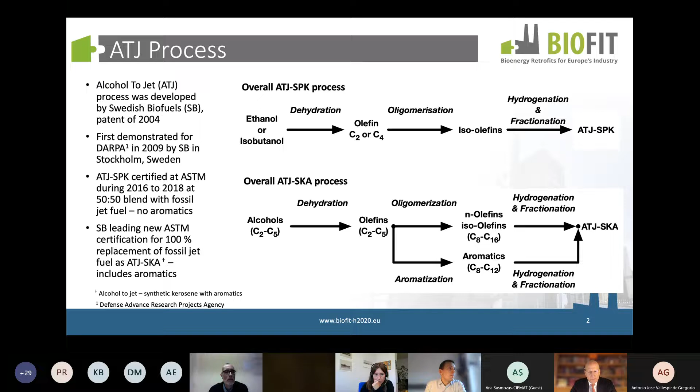So this slide is just an overview of the potential for Swedish Biofuel technology to introduce jet fuel, which has the potential to be certified as a 100% replacement of fossil fuel. Our pathway starts from alcohols, called ATJ, and that's why we were doing retrofitting on the existing first generation plant in Salamanca.

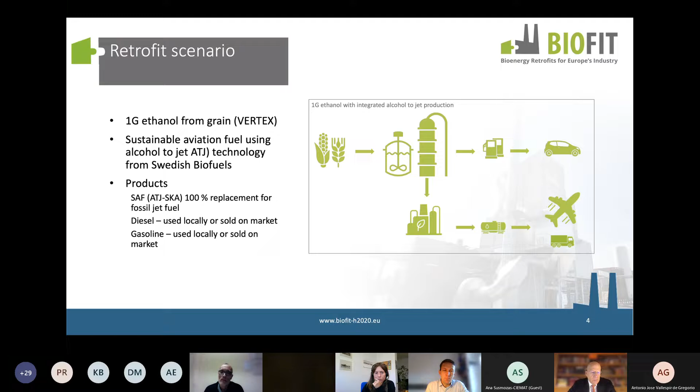Next slide, please. Andrew, is it quiet there now? I got a message that they stopped the noise. Would you like to take over? Unfortunately it's still going on, but I'll take over as soon as it's finished. All right, very good.

So we've been looking at two scenarios: one is building our ethanol to alcohol to jet plant directly at the site of Salamanca, and the second alternative scenario is whether we build the alcohol to jet fuel production plant separately close to the airport. This is in fact what Swedish Biofuel is right now doing in Sweden - building an independent ATJ production plant close to the airport, and delivering ethanol to our site. It will be slightly different because we will be using second generation ethanol, and we also have green electricity available at this site, which is a slightly different scenario than what we have in Salamanca, or in Spain generally.

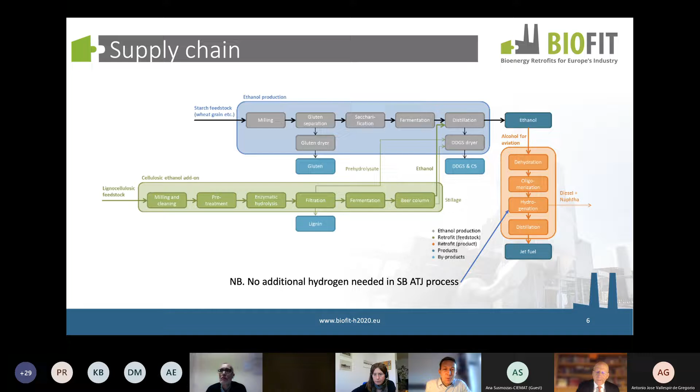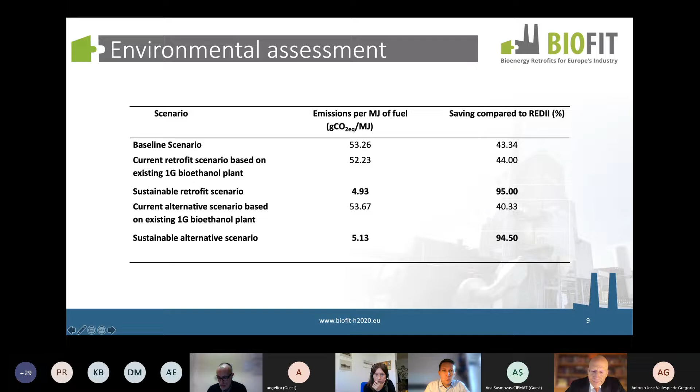That is only mitigated by the increasing price of SAF, and we expect these prices will go in the same direction. McKinsey also seems to think that, and many others too. Finally, relating to the previous slide, if there are unsupportive or short-term policy frameworks, that is also a major risk. We consider, though, that the populations of Europe are quite convinced this is the way forward, so we're not really expecting that to happen.

Key performance indicators: as already covered, carbon dioxide emissions can be reduced by 95% if the energy supply is sustainable. This basically comes down to the fact that Swedish Biofuels' ATJ technology is greenhouse gas emissions neutral.

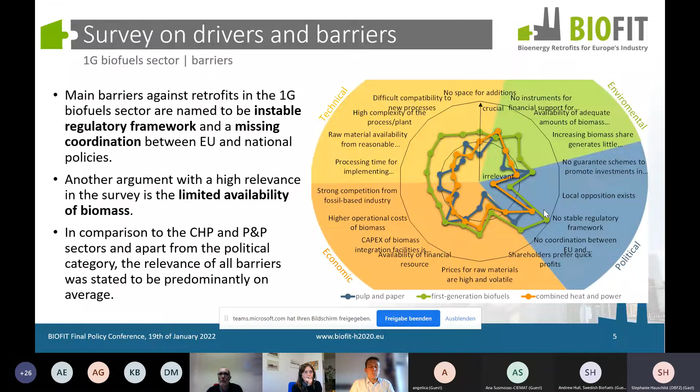The use of lignocellulosic feedstock, or the use of the produced ethanol to produce synthetic paraffinic kerosene, or even further to kerosene with aromatics - but we just heard that, so I don't want to go into detail. We have for sure some other possibilities.

Just to name one further, it's the separation of CO2 from the fermentation gases, for example, in order to use this CO2 as a biogenic resource for further processing, not only in the food industry, but also, for example, in power-to-liquid production plants, or as a resource for algae cultivation.

But you have to always consider that, even though CO2 separation is quite well developed and state-of-the-art for some fermentation plants, if you want to have a subsequent technology or implement an add-on, the technology readiness of the overall plant is dependent on that added technology. So if you want to produce liquid fuels from the CO2, you have to consider that this technology might not be as highly developed as the CO2 separation itself.

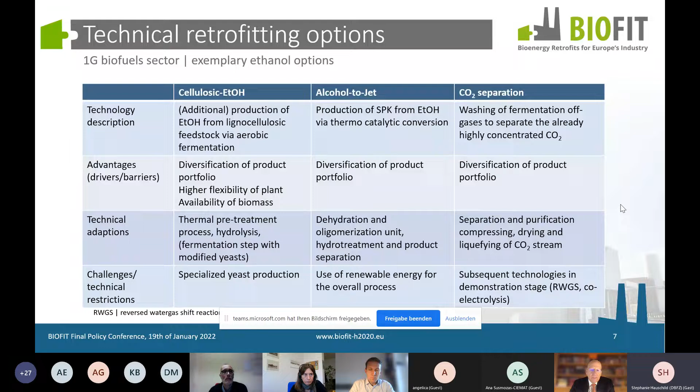But just to name some, very often discussed is the multi-feedstock plant, so to temporarily switch from vegetable oils to used cooking oils or animal fats, with all the challenges and problems we can discuss with regard to these feedstocks. I think it might be a very good opportunity to broaden the feedstock base, even though technical adaptations are quite challenging, especially for the pretreatment unit.

And it might not be the best option for every plant, especially if you look at quite large plants - you will have trouble receiving the amount of feedstock you need. Or if you have a crude glycerol upgrading unit, for example, which is also a retrofit, it might not be the best option to use this approach.